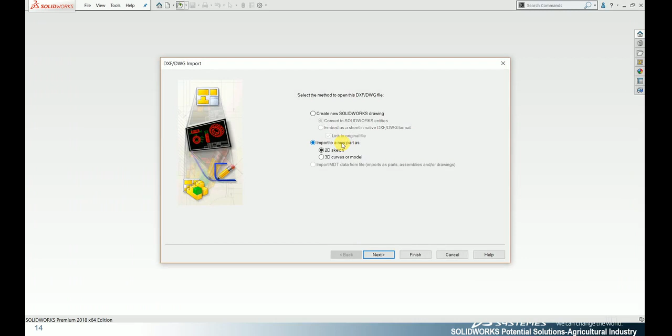Since SolidWorks is a parametric software, whatever changes I make will automatically update within the environment, so design changes happen then and there. The manufacturer doesn't need to wait for any information; I can make updates then and there.

The tools we use in SolidWorks are very user friendly. I don't want to stress on the tools I work with, so let me focus only on the design, not the tools.

So I just want to convert these 2D entities to 3D. For example, I don't need any of these 3D entities, so I'm simply deleting this 3D model. To convert into 3D, just two entities, two views, is enough for me to convert directly into 3D.

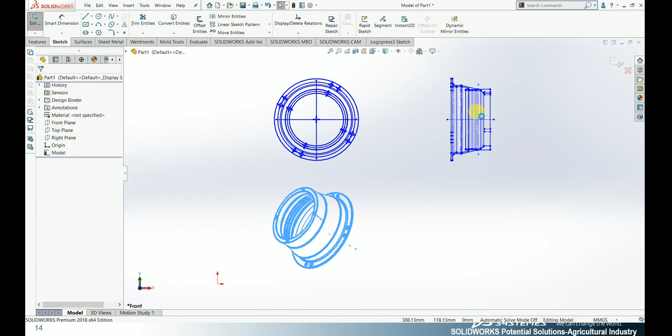So here I am going to set this as my reference front plane, and this as my right side plane.

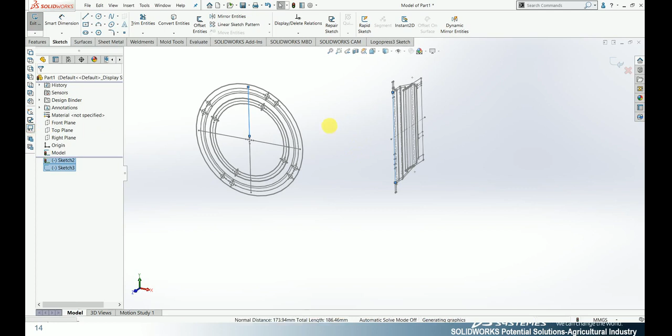Next I have to make an alignment with reference to these two edges. Automatically it takes me the locations where it has been aligned. In the front view we can see that the alignment has been done automatically, so that the accuracy can be improved. Now the 2D sketch has been completed.

Next my job is to instantly move to the 3D environment, so that I have to revolve this component. Since it is a cylindrical component, my only job is to convert these 2D sketches into 3D.

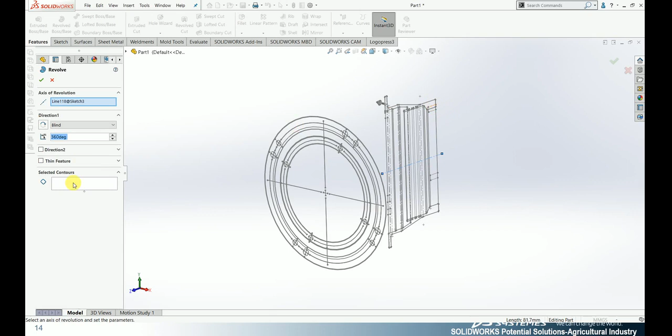Within a minute you see that I have converted my 2D sketch entities directly into 3D. Not only that, I can also do more and more work on this model, above the model, and these entities have been created with reference to these existing sketches. That is the most important term.

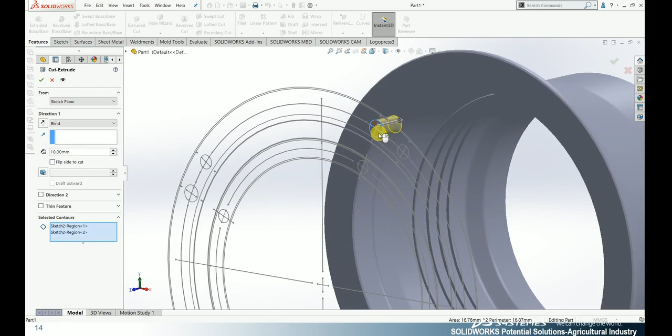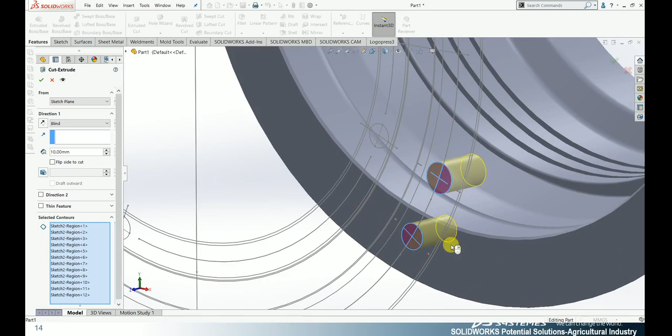I can convert my 3D models by using only the existing sketches. I don't want to redesign, rework, and spend my time redesigning the models. So this is one of the major ultimate benefits that SolidWorks has.

So I have to make an extrude cut throughout this model, so that I can convert through dimensions as well as throughout this model with reference to the edges, like that. Within a minute you see that I have completed a 3D model.

So as I told, I have to make a material. What material am I going to manufacture with? Here I can take the materials I manufacture with using real-time databases.

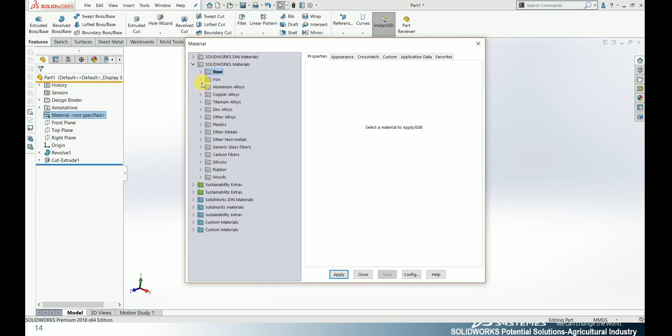Up to 250 different kinds of materials have been inbuilt, so that we can apply real-time materials. In case I am manufacturing this part with ductile iron, simply click apply, OK, I can make it. In case of any R&D purpose, the research and development process, we can retrieve the real-time properties, and this will definitely be useful for new product development.

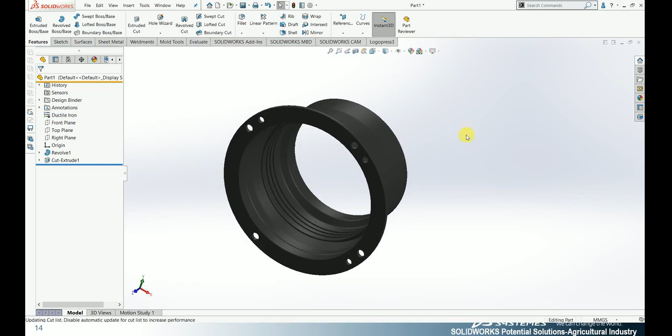Since I have applied the ductile iron, we can view it in 3D intellectually, so that after manufacture we can see what the component will look like, in the design stage itself, so that if I want to make weight reductions, I can focus on the weight.

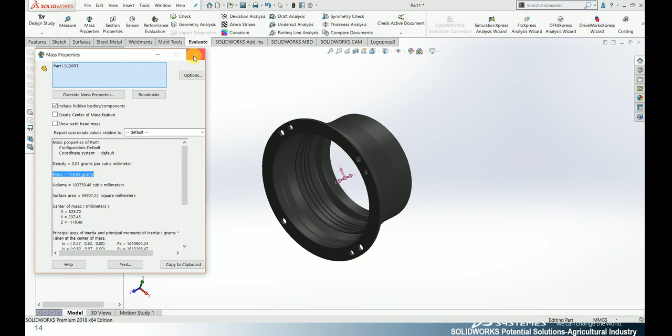For this kind of component, using the ductile material, I can check the mass of the component is 736 grams. So this is what I told: this is the most convenient tool software, so that we can do whatever we think, whatever we want to achieve, without any constraints.

So the next thing is to create drawings. The drawing is my most powerful thing. I should make clear-cut communication to avoid errors and reworks, so that communication is effective.

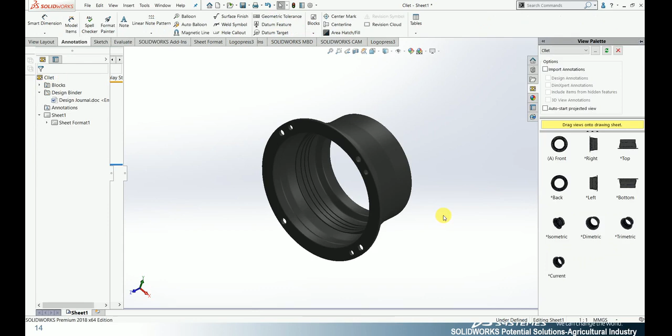So by placing the views, I don't want to manually design a view. By using the view palette, every view is automatically generated. My only job is to drag and drop wherever I need.

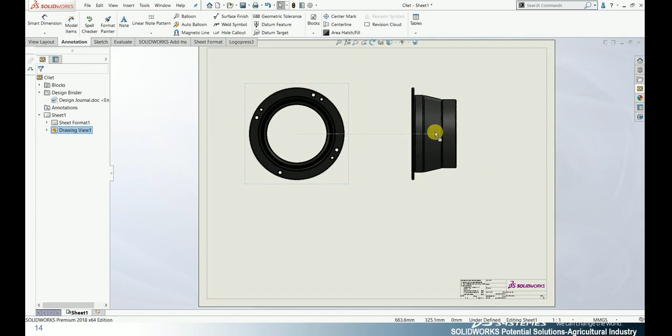For the front plane and the right views, automatically the position it takes me, see the line indicates that it automatically aligns the position wherever it needs. And for example, if I just need a top view.

The scaling is the most important thing. We have to focus on maintaining that.

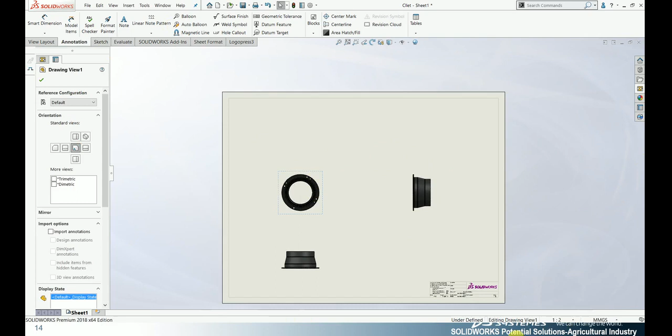In case I want to make a section view for this, I can also do that with different kinds: half sections, full sections, and any auxiliary sections to show the inclined portions, that I can also achieve.

So everything I have mentioned here is with a 3D model. For more understanding, I can also convert it into a wireframe model, so that the inner lines and hidden lines can be more concentrated. And dimensions are the most important and powerful thing.

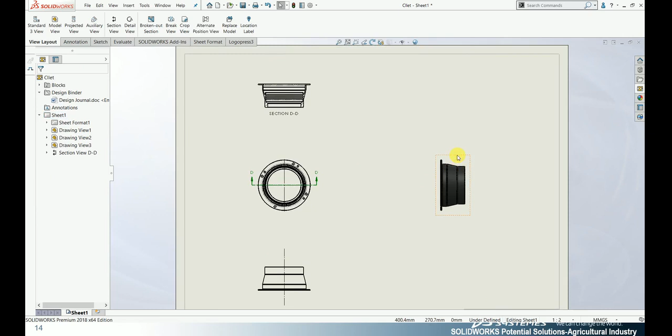As I told, dimensioning is a very easy and convenient method, so I can place the dimensions wherever I need. The alignment will be automatically done. I simply click on the edges wherever I need.

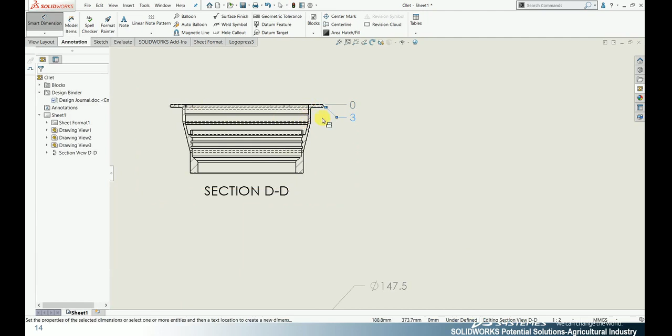Not only that, making dimensions with reference to this is also easily achieved. I just need lines and simply click on the edges wherever I need, and it gives me the dimensions with automatic reference. You can find that it automatically takes the reference with the origin at 0. So it gives me the best dimensioning tools.

And not only that, in case of any chain dimensions or baseline dimensions, that also I can achieve very fast.

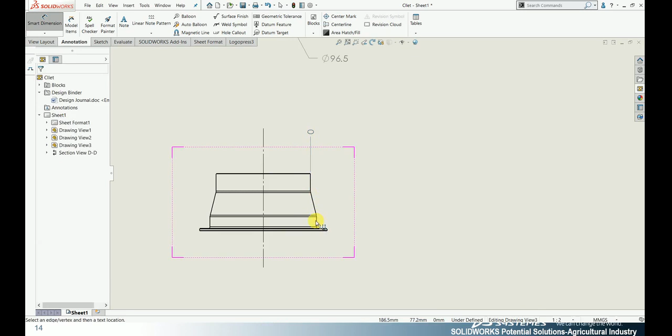So for example, this time I am preferring this edge, and simply clicking on the edges wherever I need. And not only that, by simply clicking edges on either side, these kinds of tools I can also make. Most importantly, it will definitely be preferable for precision component manufacturers.

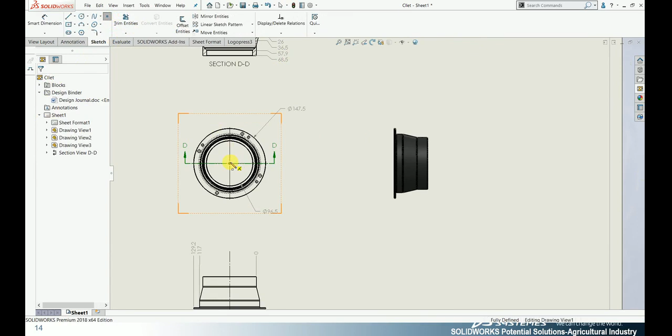So what are the holes I intended in this? I want to make a tabulated form so that they clearly understand it can be very easy to manufacture. By using the hole table, these things will be automatically generated. With reference to the sketches, I can take those hole tables automatically, so that I don't need to create anything manually.

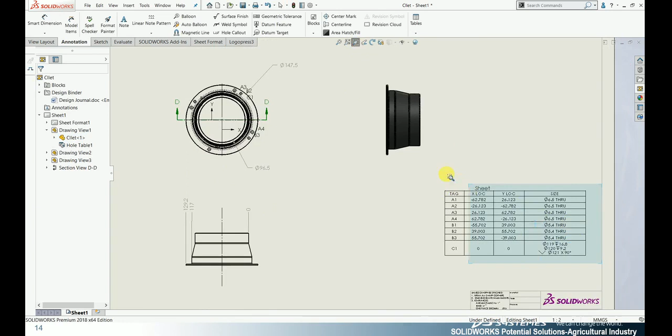Since working in the manual method leads me to errors, to avoid the errors it automatically tabulates the location, what kind of tools I use and what kind of holes I have intended. You can focus here on the tag for easy identification of locations, the x and y dimensions, and the size of the hole I have included. So these are things I can easily make, to overcome the traditional method I follow and avoid errors and rework.

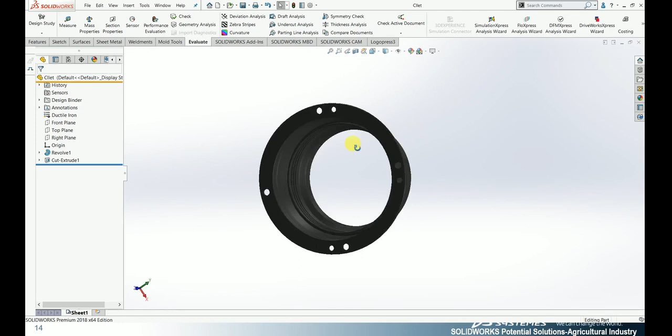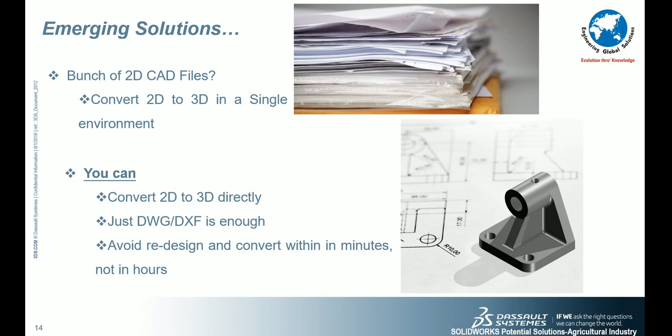Every business we do focuses on time, cost and things. So with a bunch of 2D CAD files, the greatest solution is we can convert 2D to 3D without any constraints, and just the DWG or DXF files are enough for me to convert. This is definitely useful to avoid redesigns and convert within minutes, not hours. And by applying real-time material, we can check weight or mass within the design itself, avoid manual detailing, and improve product quality.

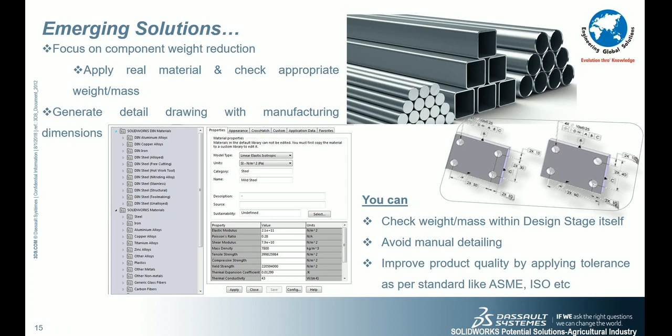The objective of this material database is to improve product quality by applying tolerances per standards like ASME, ISO, etc. The next interesting topic we are going to see is the assembly. Whatever product we design and manufacture, it should be the best fit, form and function.

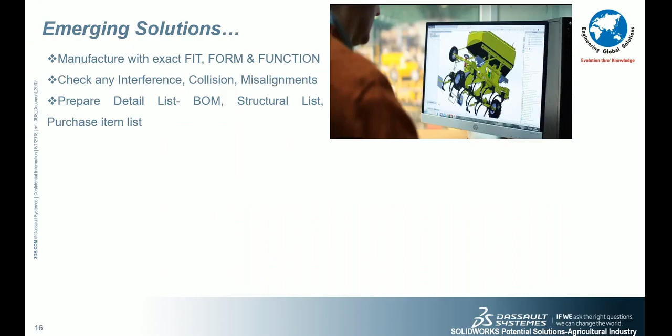We can check any interference, collisions or misalignments within the model we manufacture, and we can also create BOMs, which will definitely be useful for purchase members, so I don't need to sit and manually make the list tables of quantities. I don't want to make these things manually. I can simply click on the table, like how I created the hole table. It is automatically generated.

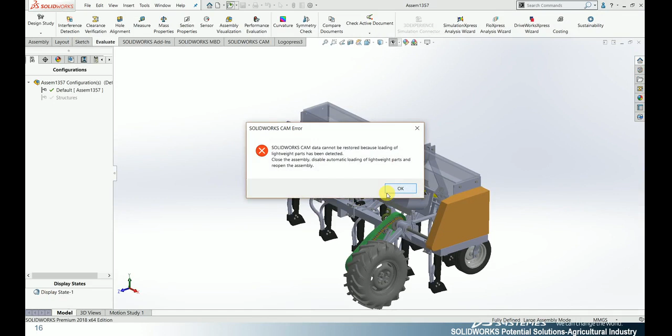For example, I want to show you the main assembly, how agriculture people can utilize their designs using SolidWorks. This assembly is simply the components I designed, brought into the assembly environment. It has 1432 components. This proves that SolidWorks can handle large amounts of files, whatever the file size and however large the assembly is. SolidWorks is the greatest solution for large assemblies.

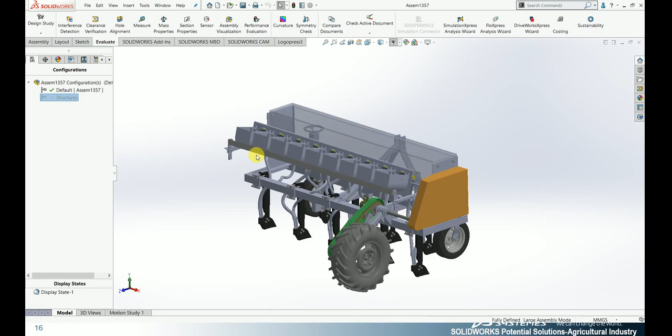Actually, this is one of the agriculture models I have shown, and different configurations can be created so I can focus wherever I design and avoid any interference. Here you can see I am switching the configuration so I can focus only on the designs without distractions. I don't want any wheels, so I avoided the unwanted things using the configuration. That is one major thing I focus on, and also creating a new part, which is definitely useful for industrial people.

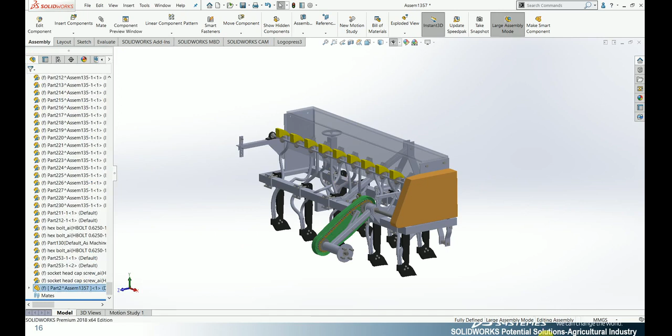The major thing I have focused on is making a new part with respect to references from the previous sketches. Let me show you an example of how I take a reference to these previous sketches. Here, for example, I want to make a side support for this component. Let me show you how I make a support within a fraction of minutes.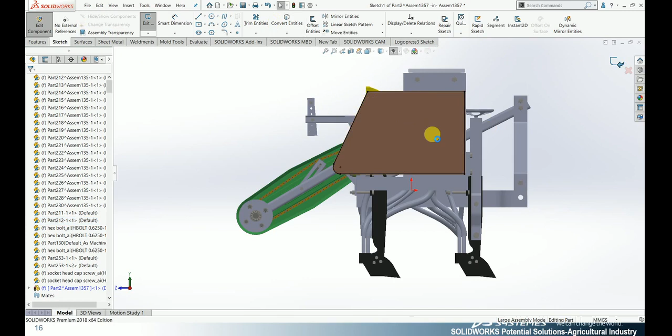Actually I have to make a reference, so I converted every edge of this face of my model, and I use these edges for the 3D extrusions. Within a fraction of seconds I converted these 2D sketches into 3D. You can see I can instantly move the 3D models, and not only that, I can adjust with reference to the scaling I do.

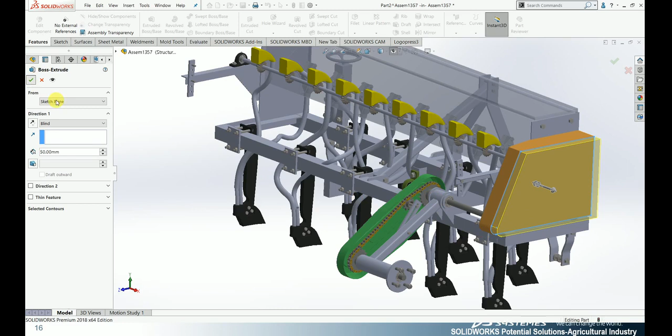And not only that, I can apply the different kinds of holes that I drill with different kinds of standards like ISO or ANSI inch. And the holes, whether it's a counterbore, countersink or tapped holes, whatever it may be, I can apply. The default database will be automatically retrieved so that I can apply different kinds of standards.

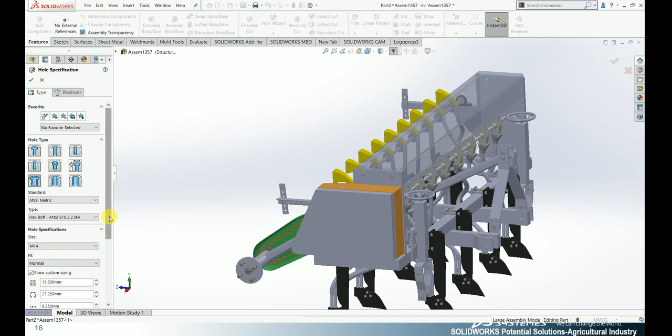For example, I am just going to apply ANSI metric using counterbores. This kind of thing I can do within minutes. And you can see the different kinds of sizes that I have taken without any constraints. So I just choose the hole I apply, and my next job is to place it wherever the hole is needed.

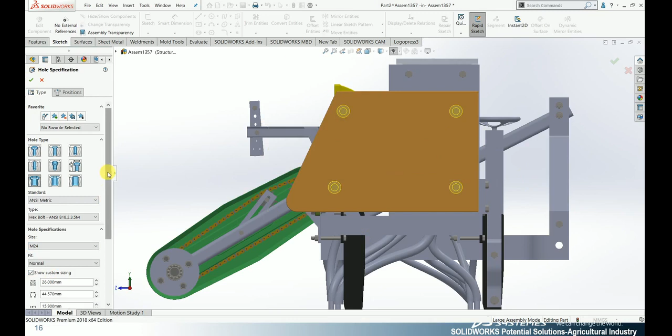And in case of any changes I want to do, I can change them then and there. For example, I am changing M14 into 24, and that also I can apply. So these are the different kinds of sets that I can control, the different kinds of tools and things I can make without any constraints. That is the main thing I am focusing on. You can do anything without constraints, so that I can make my designs accurate.

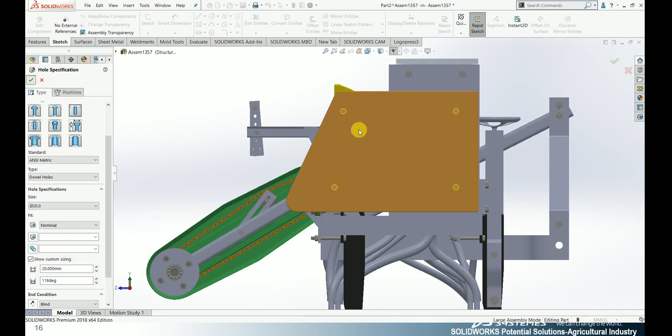You see, within a fraction of seconds I converted my holes, and my next job is to place 3D nuts and bolts. In 2D CAD software, for nuts and bolts, the standard items, we have to design individually, and it takes a lot of time. But in SolidWorks 3D CAD, we can retrieve a lot of tools within the database itself. I don't have to design any tools or wait for the standards I apply. It automatically takes the standard of the holes we intended.

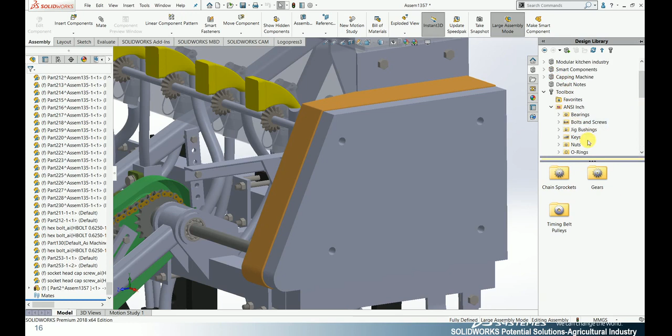Here you can see the hardware libraries like bearings, bolts and screws, keys, bushings, nuts, O-rings, and power transmissions like gears, chain sprockets, etc. Everything is in the database. Our only job is to choose whatever we need and drag and drop. So here, for example, you see I have intended 4 holes.

I have to align these holes into this part so that I can create the smart fasteners, so that it automatically takes the standard holes I applied. It places the nuts and bolts wherever I need, with respect to this standard. That is the main thing and the uniqueness of SolidWorks. Smart Fasteners is a powerful tool; it automatically selects the standard with which I intended the hole.

By using the property manager, I can control wherever I need. I can use Populate All, so that it takes every tool according to the standards I need with reference to the edges. And by simply clicking on the faces I need, this is a face I need, I can choose that. And not only that, the bearings, the bushings, as I told, and different kinds of sets I can reference simply using the design library.

Actually I need this place only. I am simply clicking Add. You can find that within a minute it automatically takes the nuts and bolts. This is the best example: nuts and bolts taken with reference to the holes I intended and the standards I apply. It automatically chooses the best solutions for the standards and holes I intended. I applied M16 holes, so only M16 is taken automatically. My only job is to simply click OK.

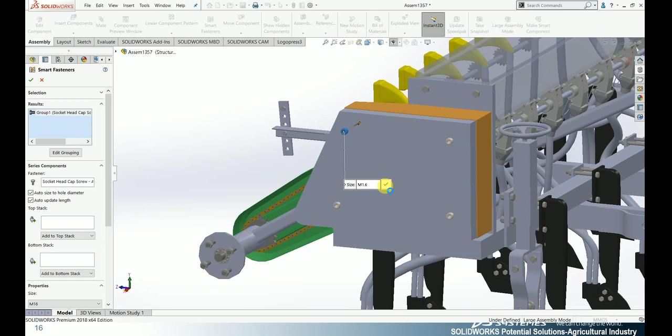So this is what I told. The next thing, I want to make the bill of materials. The bill of materials is a major thing, and before entering into that, you can see the bearings, the chains, the gears, sprockets, etc. Here I have to make smart components. I will show a uniqueness of SolidWorks, the most important thing. For placing bearings, you can find that I simply have a bearing here. I am just dragging and placing it where I need.

So suppose I need in this shaft, I can move to the shaft wherever I need, and in case of any here, this is the place, it automatically resizes. That is the ultimate aim of this bearing. So you can find that it automatically resizes the bearing. So if I move to the shaft, you can find that it automatically rearranges the size of the hole with respect to the standard I apply. So by removing the hand of this mouse, I can place the bearings wherever I need, and the matings will be automatically done with respect to the component I choose.

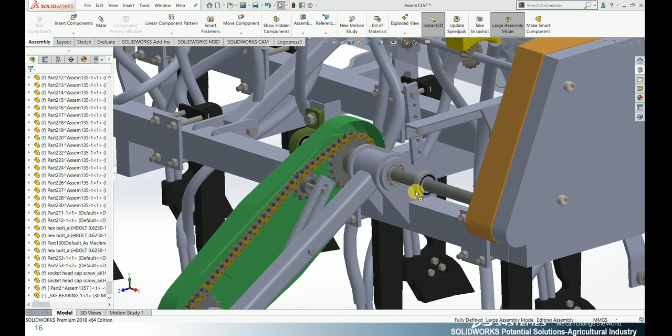And my next thing is to move on to the assembly environment. Let us show you how the SolidWorks assembly files can be handled. So the automatic generation of bill of materials, the purchase list, or the normal toolbox. So wherever the toolbox I need and how much quantity it needs, everything can be generated automatically.

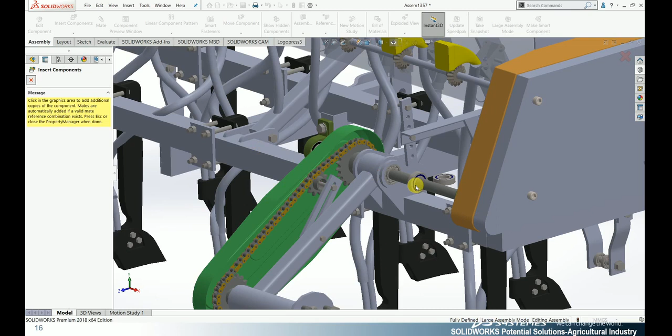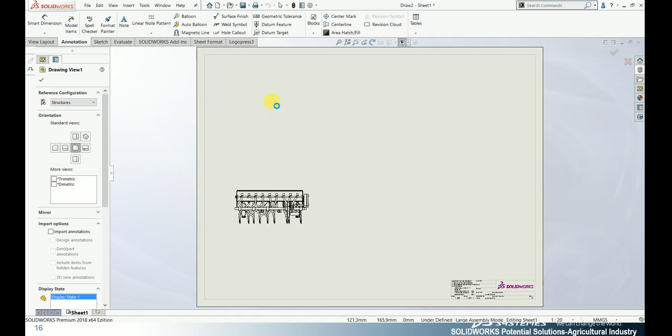So without any time wasting, I am just moving from the 3D assembly environment to the drawing environment. So here I am able to create the different sets of drawings with this kind of assembly setups, so that the bill of materials can be automatically generated by simply clicking on the place where I need and just simply placing the views, like different sets of views. Like you can see the projected view, I am using the projected view by placing wherever I need the different kinds of views, and in case of any top view or the

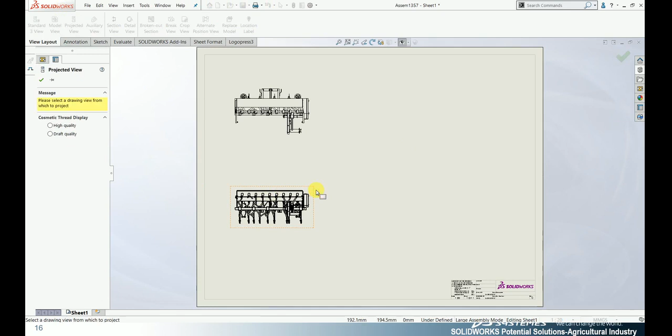isometric view. By using the isometric view, I can make an explosion of the 3D views, so that if I make any corrections or design changes, it automatically updates in my drawing, the part as well as in the assembly. So that is called associativity. So that's what I told, the associativity of the components.

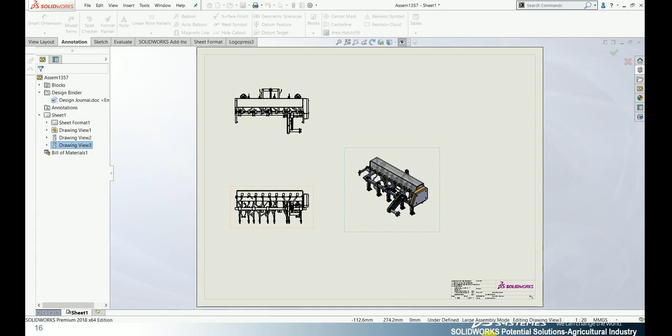So here I just want to make a bill of material for this. So simply clicking on the bill of material table, it automatically runs behind the software and generates each and every part and quantity automatically. We don't want to make anything manually, so we can avoid the manual errors, the time and the cost. So it automatically generates a table with respect to each and every component. So you can find that within a fraction of minutes I have generated the bill of material with each quantity, each component. I missed nothing.

In case of any balloons, I just want to check each component with reference to where the component is, so I want to make a balloon, but the balloons cannot be done manually. To overcome those challenges, I can make those balloons by creating the auto balloons. So automatically the balloons can be generated with respect to the bill of material tables. You can see each component with reference to where the location is, everything will be done automatically.

You can feel the difference from the manual work, the traditional method, the conventional method. You can feel the difference. So that is the main thing I just like to share. So whenever we do it in a traditional method or manually, we can feel the difference when comparing to the SolidWorks 3D CAD.

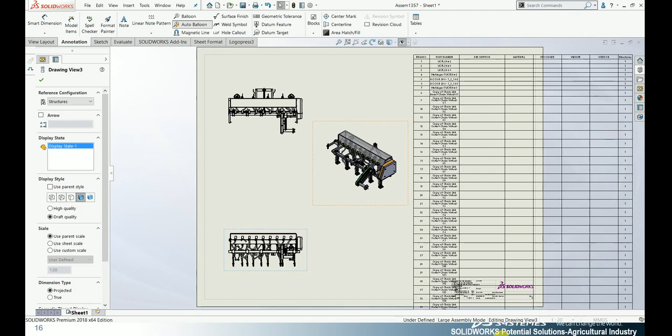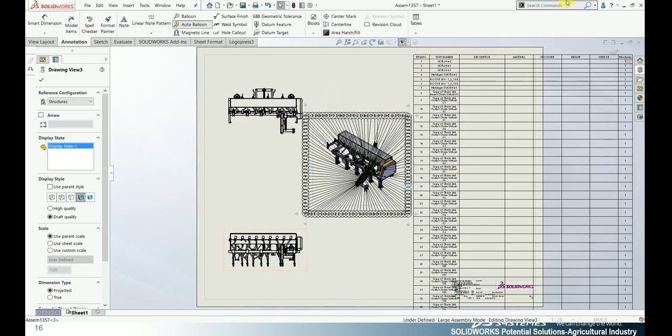And in case of any evaluations, I can make the references with reference to the different kinds of components I made, so everything is automatically generated within the software itself, so that I don't want to wait for any of the design changes as I told. So you can find that each and every item in this part references to the components where it is. In case of any mini sub assemblies also, I am able to create them with different kinds of sheets. You can find at the bottom of the screen the different kinds of sheets. I can make the different sub assemblies so that I focus only on the respective components.

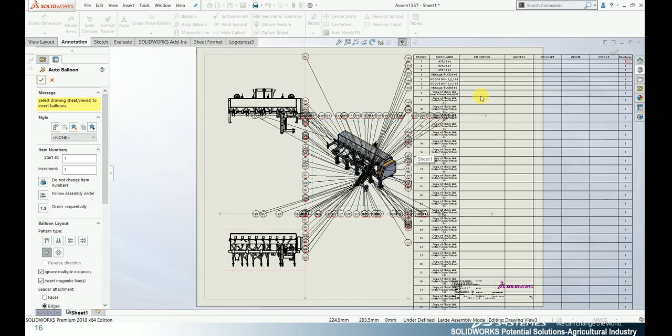The next thing I just want to share is the things we can achieve, like avoiding the assembly errors and reworks, reducing material wastage, accurate and automatic BOM, and the purchase item list, and reducing the number of prototypes. So these are the things I am able to achieve. The main objective of this fit, form and function is to avoid the assembly errors and reworks. So obviously it leads to material wastage reductions, and the BOMs and the purchase item list will be definitely very useful for the purchase members, as well as the documentation will be automatic and accurate.

So the next thing we are going to see is how to evaluate the product and what things we can achieve by evaluating the product. Before that, I have to show you: if we face any repeated failures or the maximum load acts, where the failure begins, and how strong our product will be. So these are the common questions that arise, and of course there are solutions on the right hand side.

You can find that we can predict the failure at the design stage itself, so that we are able to take respective actions to avoid those errors and reduce the number of prototypes. And of course we are able to know the product life at the design stage itself, so that we are able to recommend the exact warranty of the product that we manufacture, so that we can satisfy our customers much more.

So let me show you the simulation part and how it will be more helpful. So in this I have tested the same agriculture model that I have created.

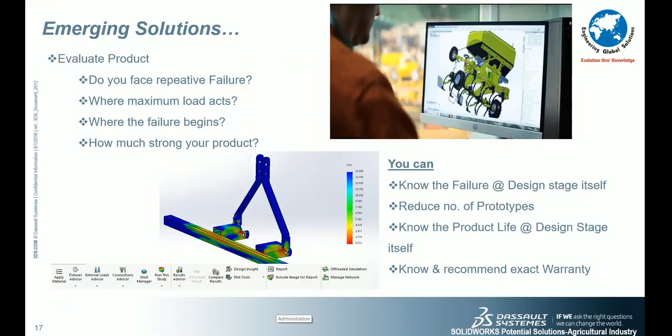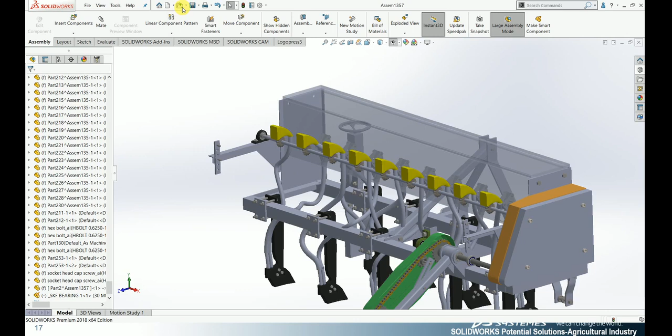I'm just closing this document, and let me show you a best example of another plant seeder requirement, so that you find the different kinds of analysis you can do, with different structural analysis and different kinds of bolt strength analysis. So these are the things we are able to achieve in a very easy manner. So actually this is one of the plant seeder models you find here with 262 components.

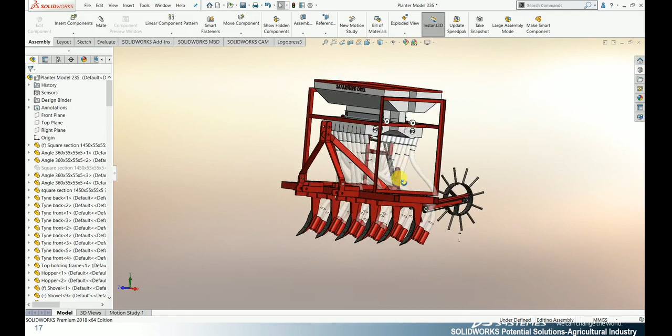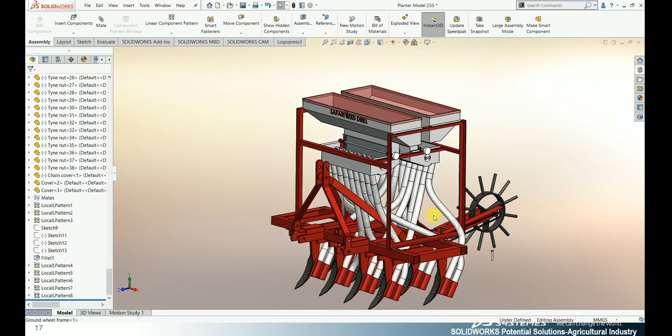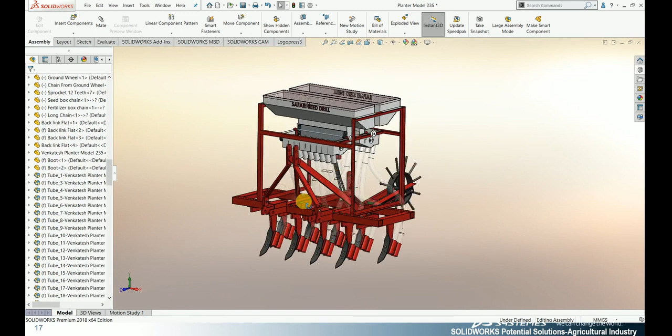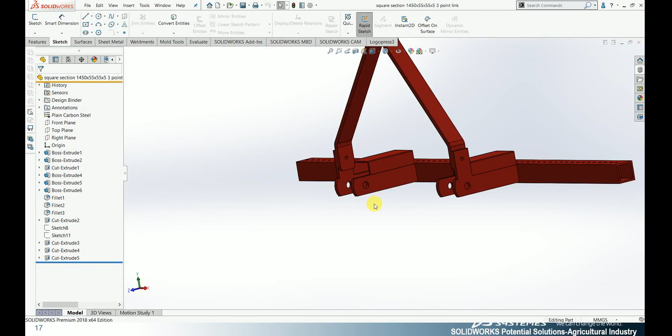So this machine has different configurations with up and down and with the rotary motion, so that you can find the rotation motions, etc. So in this scenario I just want to make an analysis for this component. Here, whatever analysis we do, we have to focus only on the most loaded areas. So in that order I just want to focus here, so that you can find the component's individual environment, and the analysis can be done within the software itself. I don't want to go to any additional software or outside of the software.

So the software simulation will be a great solution to analyze the product and evaluate our product among the customers, so that we can satisfy them by recommending the exact warranty. And not only that, we are able to do the things we do in real time, like the analysis with respect to the fixtures or the force, and where the force acts. So these are the things we are able to achieve here. And not only that, as I told, the bolt strength analysis, the weld strength analysis, and any life warranty analysis, everything I am able to make.

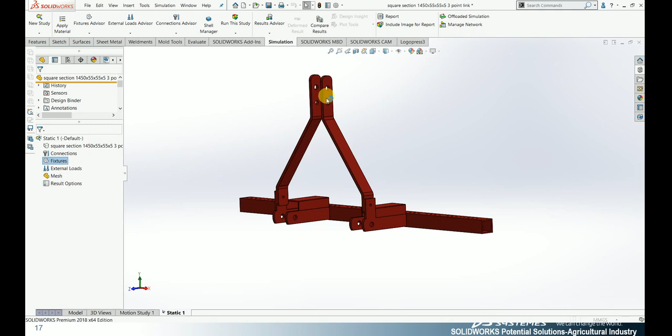So in this scenario I just want to make a static study of this model by making the fixtures. There are different kinds of fixtures I can make with real-time scenarios, like fixed geometry, or one end fixed and another free to move, and the roller sliders. So these are the different kinds of fixtures, even a bearing or the elastic supports. In this case, for an example, I just want to make a fixed geometry, so I am going to fix these cylindrical areas. You can find these are the areas I just want to fix.

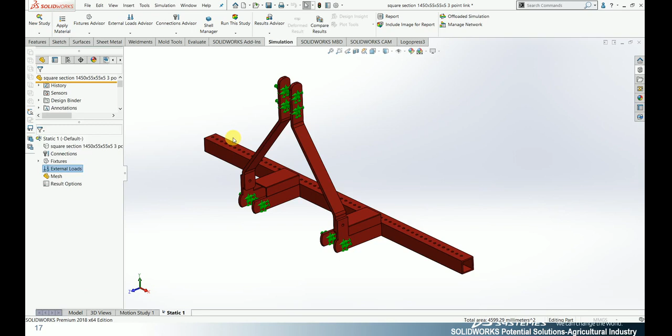And not only fixing the areas, I have to make an application of force. Those forces can be the torque, the pressure, the gravity, or even the temperatures in case of any thermal analysis. So everything we are able to do. So here my force acts upon the surface towards the downward direction, and for an example a 10,000 Newton force I am just applying on the upper surface with respect to the arresting of these two edges. So you can find that I have applied a force, the geometry has been fixed, and what material I have manufactured this part with.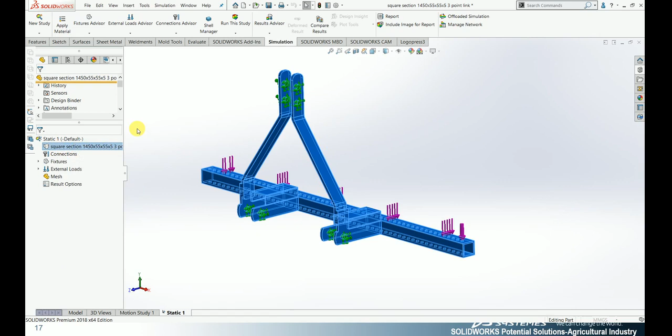So as I told in the previous presentation, the material we apply we are able to create in the database, so I can take it to the real-time environment. In this case, for an example, I am making this analysis for a grey cast iron product. So simply choosing everything I need and just clicking run, it automatically runs the formulas and equations behind the software. So everything will be automatically calculated, and the final result will be shown on the screen.

And not only that, we are also able to take a report as Word documents, so that we can share it with our customers or prospects, and we can guarantee that our product will have a life of this many years or months, and where the first failure begins and the maximum failure area. So these are the things we are able to retrieve from those reports.

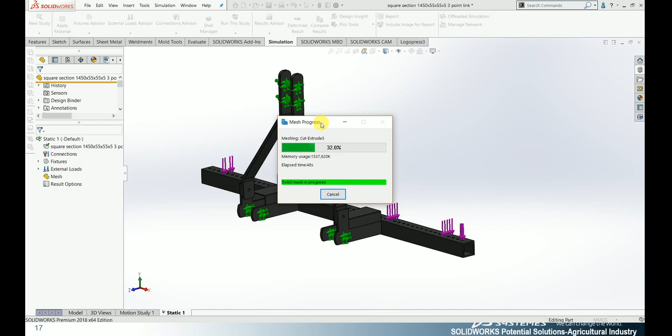So in case of any motions, that also I can able to do, like linear motions or the non-linears, or either dynamic. So this kind of analysis can also be done. And not only that, as I told, the flow analysis, like wind: if my product acts in a wind, how much wind force it requires to move the component, or any failure will occur due to that wind force, and the thermal analysis due to the temperature. So everything I can able to calculate within the SolidWorks environment itself.

So the final result of my 10,000 Newton force with arresting these edges, you can find on the right hand side, you can see the chart. So for better understanding, I will make you the floating values, so that you can find that my maximum stress will be the 210 megapascal. So this chart will be a greater reference for me.

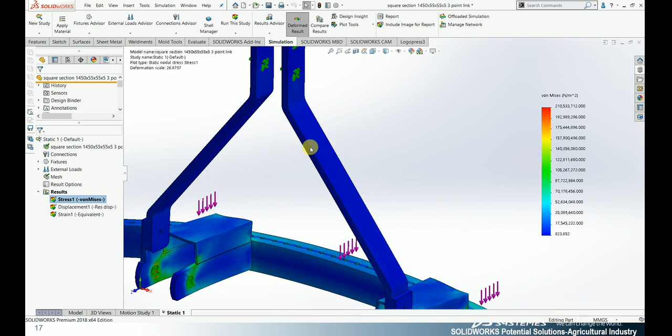It starts from blue color to the red, which tells me that it is gradually going to the failure stage. So by understanding this blue color, wherever the blue color occurs in the model, yes, it is safe, so that I can manufacture by this much of thickness itself. The red color shows that I have to increase either the thickness or the product dimensions.

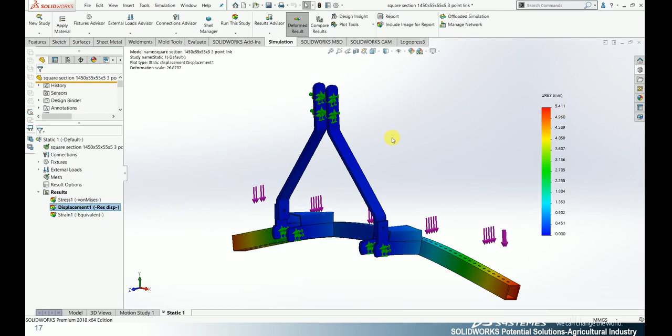And in simple terms, you can find the displacement of this model by understanding this chart. It shows from the blue color to the red color, as I told, and my maximum displacement will be 5.41 mm. So you can find that this is what I told. By utilizing this chart, I can understand that my maximum displacement at 10,000 Newton is 5.41 mm.

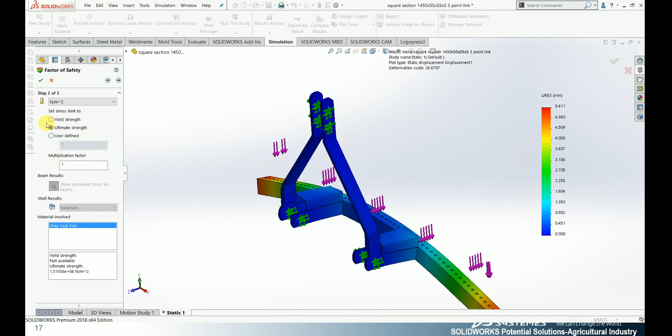And not only that, I can able to calculate the factor of safety also. So that is one of the major things we have to focus on while evaluating our product. I can be able to make the factor of safety with respect to the constraints. Within the limitations also I can able to set. And the yield strengths and the ultimate strengths. So everything I can make without any constraints.

So by applying the 10,000 Newton force, by arresting these edges and my 5.41 mm displacement, my factor of safety will be 0.72. Of course, this indicates the failure of my product, because every part, every component we manufacture should meet at least one times the load we apply. And most industrial people follow 2.5 times the factor of safety, so with any thickness changes, any dimension changes, load decreases, or support improvement, I can able to improve my factor of safety.

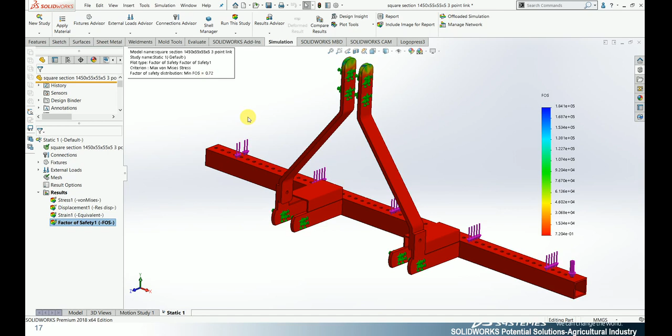So let me come to the end of the session. As I told, we can know the failure at the design stage itself. Obviously, the objective of this SolidWorks simulation is to reduce the number of prototypes and to predict the product life at my design stage itself. I can predict the product life and can recommend the exact warranty of the product I design.

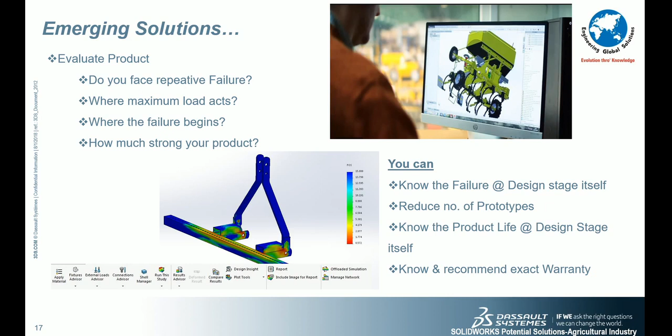So guys, let me move on to the end of the session. I just want to summarize my things. At last we can eliminate a bunch of 2D CAD files. Suppose there are a lot of papers on my table; without any limitations, we can turn every 2D CAD file into 3D, and the material wastage can be avoided, so that the assembly errors can be minimized.

To communicate effectively, the detailed drawings are very much fast and accurate, with exact tables like bill of materials or the hole tables and the purchase list. So everything I can generate automatically from the design I do, so the avoidance of inventories is definitely useful for the purchase departments and also for documentation purposes, and we can able to reduce reworks.

So our rework can be reduced and the productivity can be increased, so that the product quality and product reliability can be increased, and the number of prototypes reduced, so obviously I can reduce my prototype cost. So at the end of the day, everything I want to achieve, I can definitely meet my project timeline, so that I can reduce my lead time without any constraints.

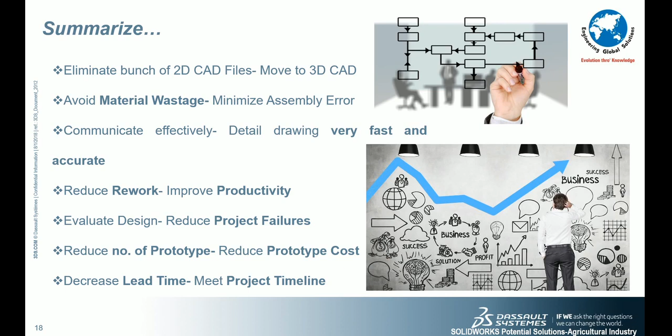So at last, I would like to say that 85% of the product cost is decided by the 3D design. Thank you.